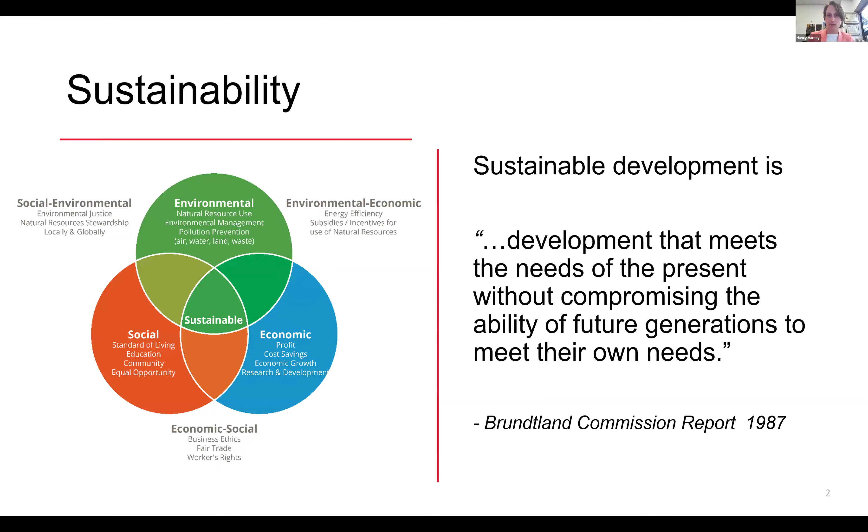We have to make sure we're making decisions in terms of costs and money, as well as the carbon, the environmental side of things. So we always need to keep in mind that sustainable development, when we're thinking even about building new buildings on campus, is making sure we're meeting our present needs without compromising the future generations and their needs as well.

One of the big things that we're seeing is this rapid growth with new construction. Just some of the numbers they're throwing out are kind of wild, but thinking about building floor area, office buildings, apartments, everything like that, it's expected by 2060 — these numbers are a little uncertain but still pretty relevant — it's the equivalent of adding an entire New York City to the world every month for the next 40 years. And thinking about that, three-quarters of the infrastructure that will exist in 2050 has yet to be built. So that's a lot of construction, a lot of materials, both costs in terms of money and carbon going out into the world.

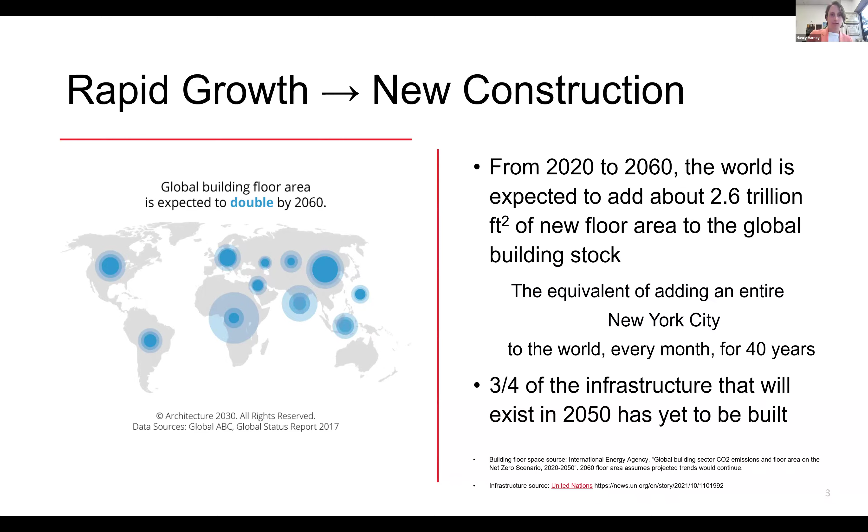So trying to make smart decisions as we go through this. When we hear about carbon emissions, so CO2, we group all of the greenhouse gases into an equivalent carbon emission. Most people think of transportation — we're making great strides in better green energy in terms of our transportation — but the built environment, our buildings that we live in and work in, actually contribute a large amount, approximately 40% of annual global CO2 emissions. 27% of these are from our building operations: heating, cooling, electricity, everything that we use in our day-to-day lives.

And about the rest of it is what we call embodied carbon, essentially what's locked into the building from day one. A lot of this is in our four major structural materials: cement, steel, iron, and aluminum. But also masonry, and all those other pieces that if we can try to reuse, it will help make great strides in creating a greener built environment.

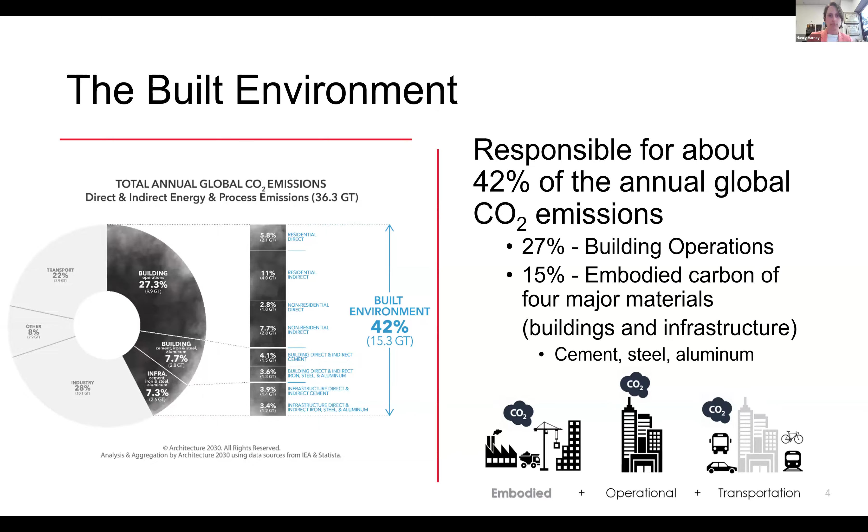We have a lot of organizations focusing on making sure we're reducing carbon in our built environment. Architecture 2030, MEP 2040, and SE 2050 for structural engineers are all targeting different ways, both on the operations side and the embodied carbon side, to make structures greener.

So just highlighting embodied carbon, because that's what we're going to be focusing on today, in terms of what's locked into our buildings and what we're going to try to save when we're going through deconstruction projects.

Our carbon emissions, all of our greenhouse gases kind of equated back to CO2, are associated with building or infrastructure products and the actual construction of them too. It's everything from raw material extraction, digging out the iron ore, mining the limestone for concrete, the manufacturing and transportation of these items through each step in its life, including construction, through the end of life, either disposal or recycling. Recycling is key, kind of keeping everything in this circular economy, but to the extent that we can as an already fabricated piece.

So like I said, once it's locked in and constructed, it's not carbon that can be taken back or reduced. It's built into the structure.

So we see that the majority of our carbon emissions is really locked into new building infrastructure projects. We're continuing to improve operational efficiency through better insulation, more efficient HVAC systems. But what we really need to work on now is improving embodied carbon.

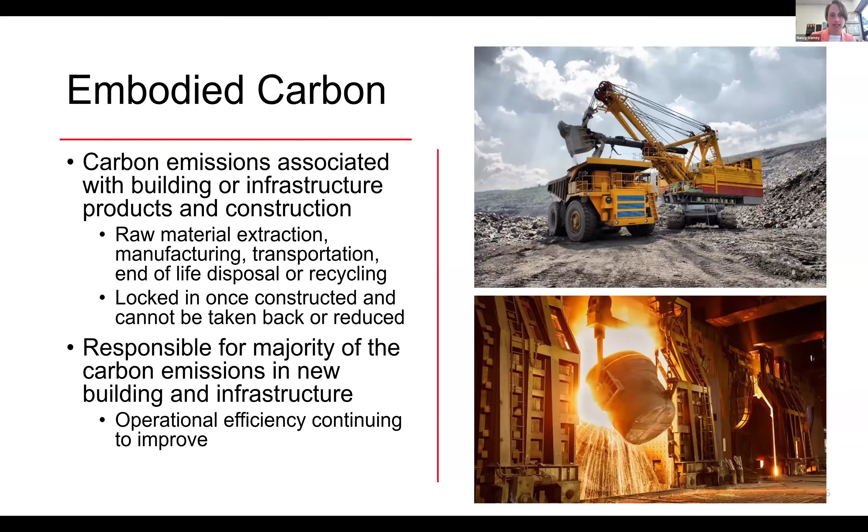So kind of breaking this out into some more Carbon Leadership Forum cartoons, really we're looking at embodied carbon: materials extraction, manufacturing, transportation, all of that is built into this embodied carbon slice of the pie. As we continue to make operational energy more efficient in terms of our lighting, ventilation, water heating, cooking, all of that, we can see that slice decrease, but our embodied energy becomes a bigger portion of it. So now that's our next challenge to tackle.

You may have heard a lot about carbon offsets in terms of our renewable energy production and carbon sequestering, which helps reduce the total net carbon impact, but we need to attack it from all fronts. One solution alone isn't enough.

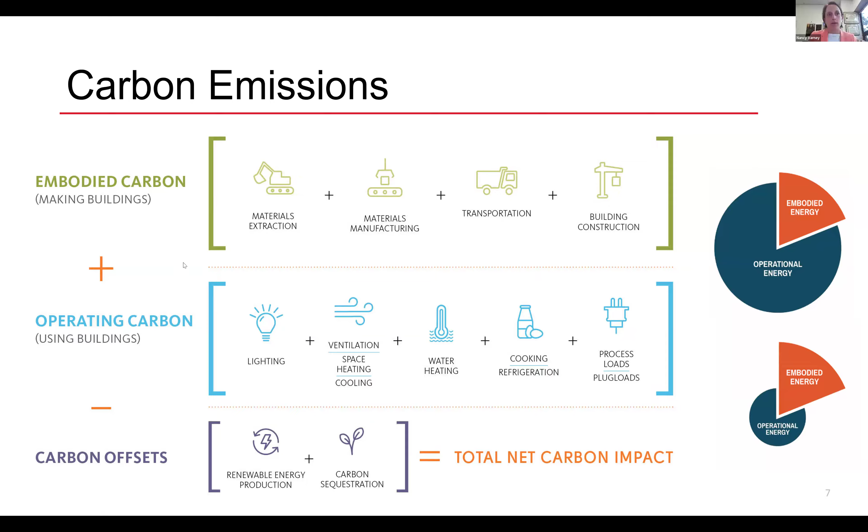Focusing on the structure itself, MEP and other makeup like finishes and things like that are a smaller slice of the pie when we're looking at the embodied carbon of a structure.

And I found this old photo of the Prudential Center under construction, which I thought was pretty awesome, just to see how empty it is around, but it just shows the skeleton and the beginnings of the enclosure going up. But if we're thinking about everything that we're seeing in this photo right now, the structure is 40 to 50% of the total embodied carbon locked into that building from day one, and the enclosure is another 20 to 30%.

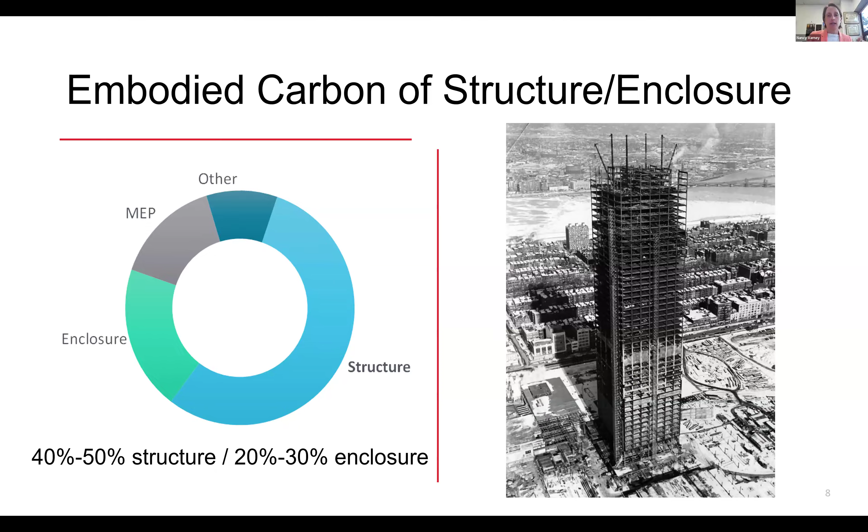So a lot of carbon already going into every structure from the very beginning, before we even turn the lights on. As we go through planning any of our projects, whether it's on campus, in Boston, or in the greater global area, we need to consider what we can do, and the sooner we make good decisions, the bigger impact it can have.

The easiest thing is to say to build nothing. In that case, we're not spending any carbon, we're being very green, but we need to see if that really satisfies our needs. A lot of times we're building things because we're growing, we're expanding.

So we can potentially build less or make use of things that already exist, reinforce bridges, expand buildings, or be clever about our designs, or build more efficiently. Each one of these has a decreasing amount of carbon reduction potential.

Building none reduces 100% of the carbon because you're not doing anything. But it also means you need to start at a different stage in the whole construction process.

Planning, design, construction - the sooner that we can start thinking about these things, maybe reusing existing structural elements or finishes or refrigerators or whatever you have, the bigger impact that we can have. So early stage design decisions are key.

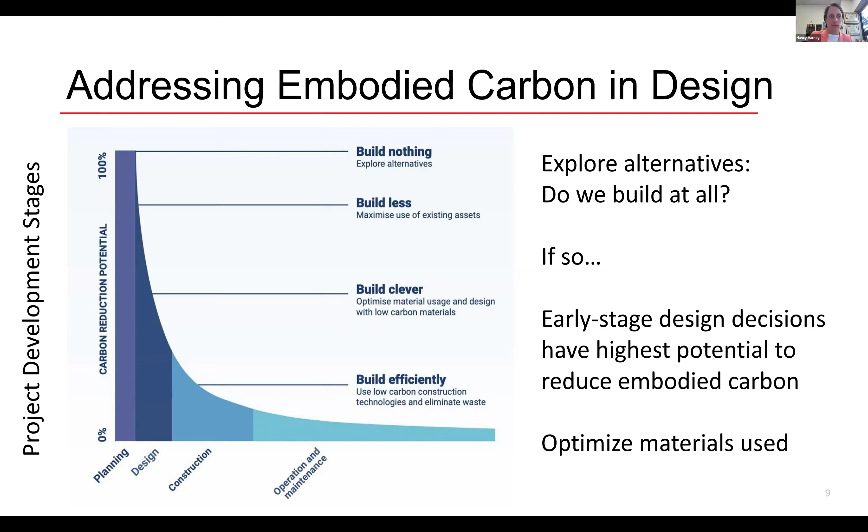And also with that, we can kind of see what else we can do along the lines. So one way to assess an entire project is to develop a life cycle assessment, to take a look at what's happening from stage one, raw materials, through construction, maintenance and use, and the entire end of life of a building. So this gathers information from raw material all the way to where it's returned to the earth.

The best thing we can do is keep all of our existing structures going. But there have been issues with, let's say, structural compromises, or it's just not a particularly useful program anymore. We can find ways to take pieces out of those structures and reuse them in new structures to help keep this cycle going.

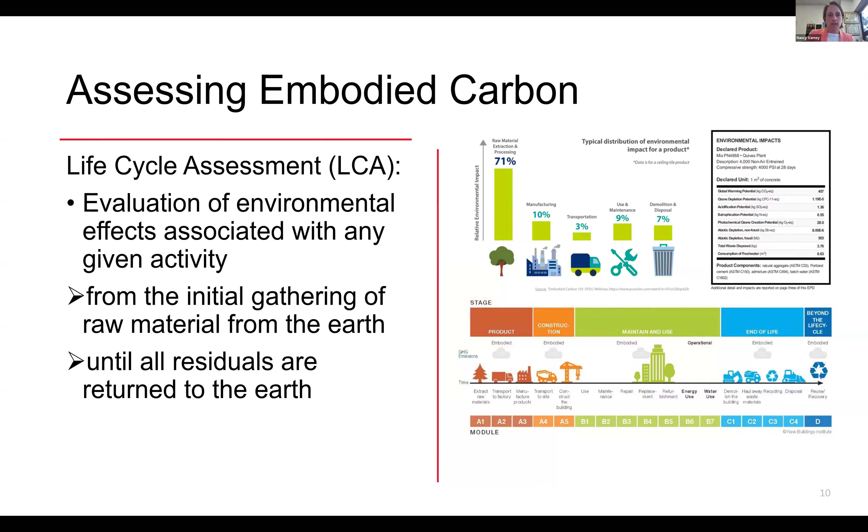So our goal is really eventually to achieve zero embodied emissions. So this whole reuse, reduce, or sequester is kind of adopting the principles of renovating existing buildings, reusing recycled materials, or even better, reusing materials as they are. We don't have to melt down steel beams if we can pick them out of one building and put them in another.

Or this idea of designing for deconstruction. We can deconstruct a building, reconstruct it somewhere else in a slightly different configuration to keep that use going. In terms of materials, we are using new construction, making sure we're using the right type of materials for the right uses, optimizing sizes, and specifying low to zero carbon materials to help decrease the overall impact. And then sequestering is our third step, which is trying to find ways of pulling carbon dioxide out of the air and storing it in some use or another.

A big way of doing this now that people like to talk about is using mass timber, using trees naturally to sequester carbon and lock them into our structures.

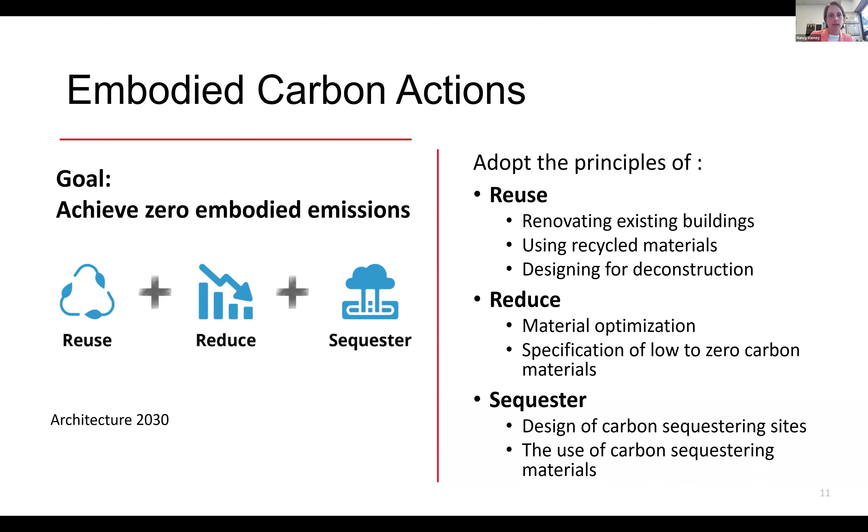What we're focusing on now is what we're doing with our existing buildings that are no longer meeting the use that we need them for. We have to weigh all of our options and decide what's the best course of action, because even demolition alone has a huge environmental cost. Unfortunately, our culture kind of prioritizes tearing down structures instead of reusing or retrofitting them. We like to be in the most fashionable, not only with our clothing, but our structures as well. So changing that mindset is a slowly evolving process.

We can find that as we start to recover and recycle a lot of our materials, we can make a bigger impact. But this consumes additional energy because it's a slower process. You have to be careful about not accidentally damaging the structure as you're taking it apart. It's pretty complex, it takes a lot of time, and for now it only has a minor impact. We need to move this forward and see how we can reuse a lot of our structural members, our architectural finishes, our appliances, everything in existing buildings, and find new homes for them.

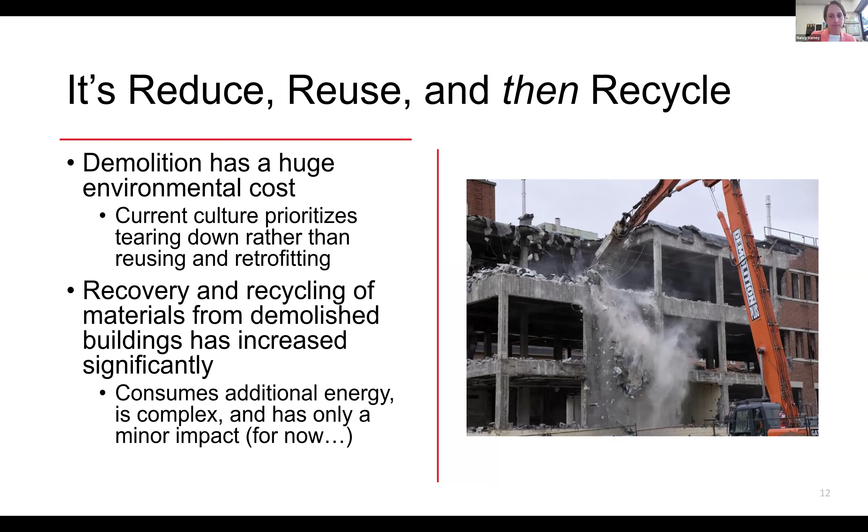So on the other side, instead of just completely demolishing a building, we try to use these materials, diverting them from potential waste streams, keeping them out of the landfill to reduce the consumption of new material, and even maybe contribute to the aesthetics of new construction. If you can incorporate something old, something cool looking, and really appreciate where it came from.

I guess I'm not an architect, so I can't speak to that too much, but I love seeing exposed structure. That always makes me excited, even if I know that it came from somewhere else.

So when we're talking about salvaging as opposed to recycling, salvaging is reusing an existing item with minimal processing. We're not melting anything back down, we're not bringing it back down to a raw material. We're essentially cleaning it up, maybe adding some new bolt holes so we can reuse it, trimming it to size, but we're not putting in as much energy as recreating the entire system.

Recycling, on the other hand, is actually destruction of a used system, melting it all the way back down so that it can be manufactured into a new product. So again, when we're thinking about deconstruction, we need to be careful. It's the careful disassembly, salvaging as many components as possible. You can't really come in with a wrecking ball and start taking out the building. You need to take a more slow and costly approach.

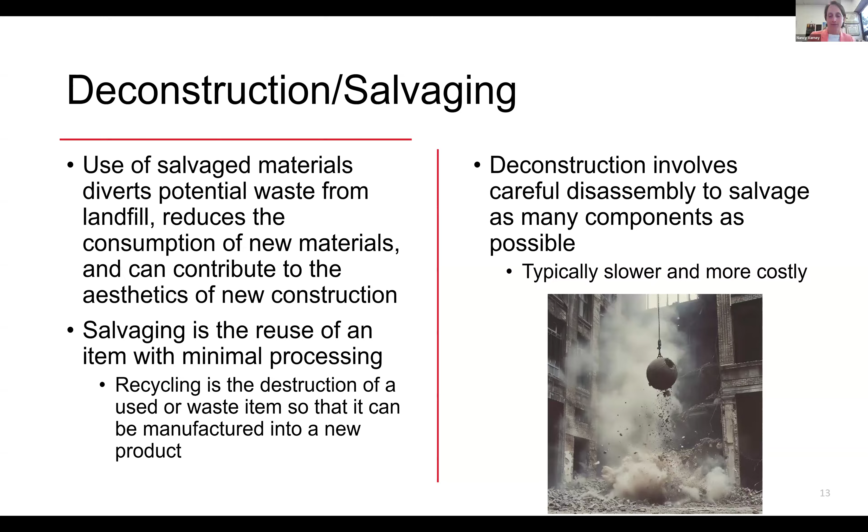So some of our structural design considerations that we take into account are what materials work well. Brick, steel, and wood usually can be taken out of one structure and put into another. Concrete is often what we call downcycled because it can become contaminated through road salts and other issues, oils, things like that. So a lot of times we'll crush it up and use it as a base. It's not often remixed into new concrete mixtures.

Something we need to make sure we understand, at least on the structural engineering side, is knowing where our materials come from, giving clues to their structural properties. We didn't know how strong our materials are, if we're able to weld to them. The photo I'm showing here is an example of a riveted steel beam and column system. We wouldn't necessarily trust this steel to be weldable, so we have to take special precautions when we start to try to strengthen it or attach new members.

And also durability, that's going to be key. Has there been any issues with corrosion, rotting wood, or concrete spalling that we need to consider if we're starting to reuse members?

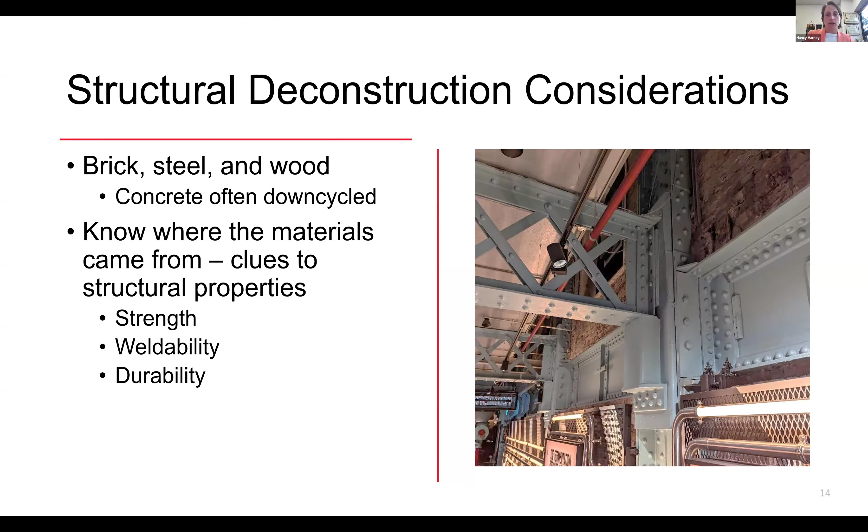So some of our challenges, let's say you have this great old building, it's got some good bones, but we want to make sure we understand all of our challenges before we start to take it apart. One would be going through our material testing to understand the properties so we know what we're able to use in any future designs. Considering any issues with contamination.

Those are all cases where we need to go through and examine everything, but it's tough in an existing structure because a lot of the structure itself, those bones if you will, are hidden. So making sure we understand contamination and damage, either existing or as we start to deconstruct things, will cause issues. So kind of being more careful with what we're doing.

The photos I show on the right are from a Walter P. Moore presentation where they deconstructed part of an old stadium down in Georgia to salvage some steel elements to reuse in a reconstruction of part of that stadium. But part of it involved carefully taking apart the concrete deck of composite steel beams, which is time consuming. So thinking about those logistics in terms of the cost and schedule.

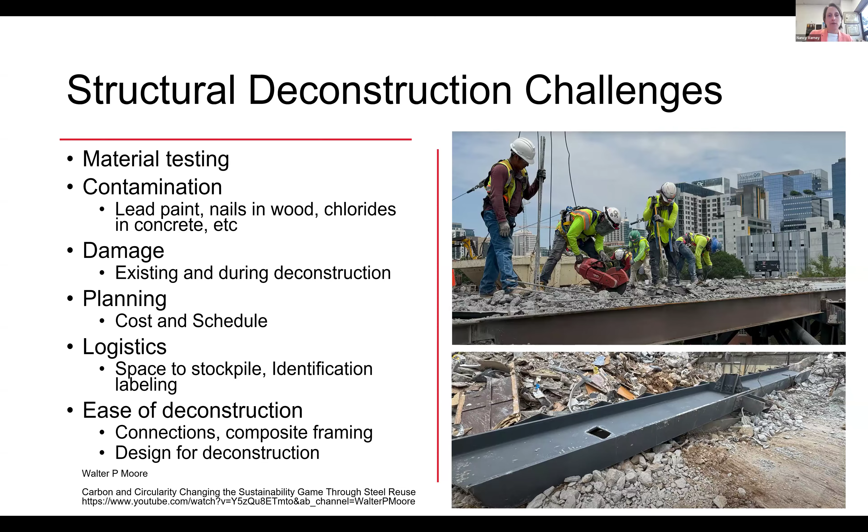So kind of leaving you with one idea, this whole sustainable stewardship, that buildings are vast repositories of energy because of everything that has gone into them already, from the raw materials to the manufacturing, construction, even from day one. And all that energy is embodied already in the finished structure. And if we demolish it and throw it away, everything that was locked up in there is totally wasted. So we want to make sure we can find ways to bring all that back into any new structures and kind of keep this circular economy going.

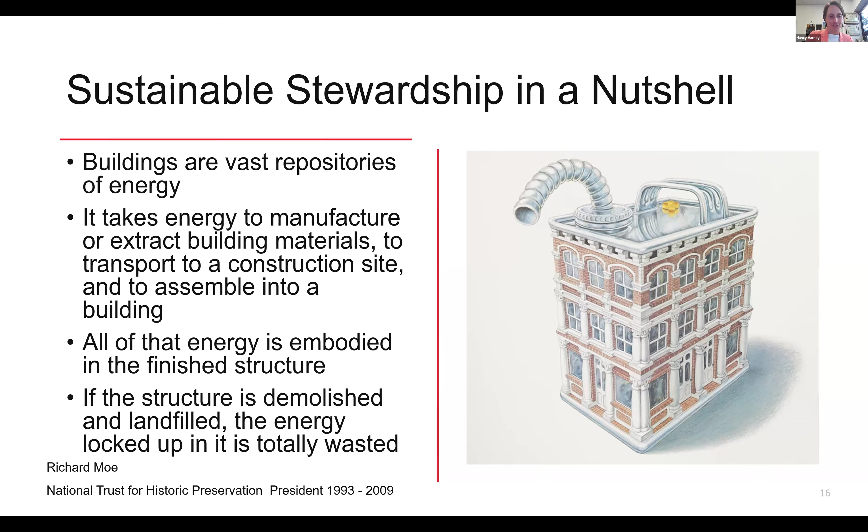And that's pretty much what I have. It's a rough, quick introduction to structural sustainability in a nutshell.

You can kick it over, it's fine. Actually, so, unshare. Juan, if you don't mind, I think maybe keeping it at Nancy, any questions you might have.

So Nancy, thank you very much. That was a really great overview of what's embodied in a building. Would anybody have any questions right now, just for Nancy? We can always ask them later, but anything come to mind for folks?

I have a question. You referred back to being able to sequester, I think that's the word you used, carbon in the materials. How do you kind of figure that, particularly when you're talking about cross-laminated timber? How does that figure into the modeling?

So when we're working with timber in particular, we work closely with forestry experts, with the idea that if you let a forest grow, the trees are going to continue to sequester carbon throughout their lifespan. But if they were to naturally die and rot or burn, that carbon gets re-released into the atmosphere. So through sustainable forestry, we can actually cut down the trees when they reach a certain life, since they're not sequestering as much carbon as when they're younger.

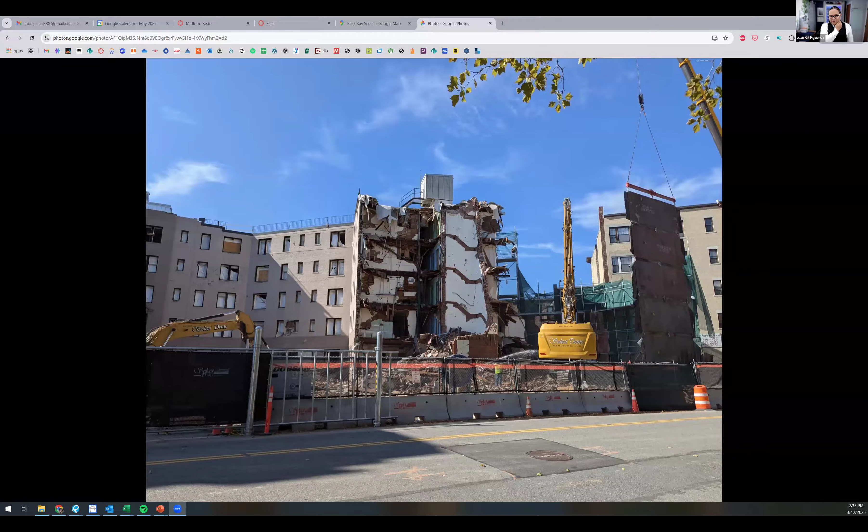So that's actually that guy there, that's a 30,000 pound steel plate system that was custom made by the demo company, so that if something were to release off the building, it doesn't go into the street or hit any of the adjacencies. It's an incredible system, and it took a lot of coordination to make sure it was there and that it wasn't in the way.

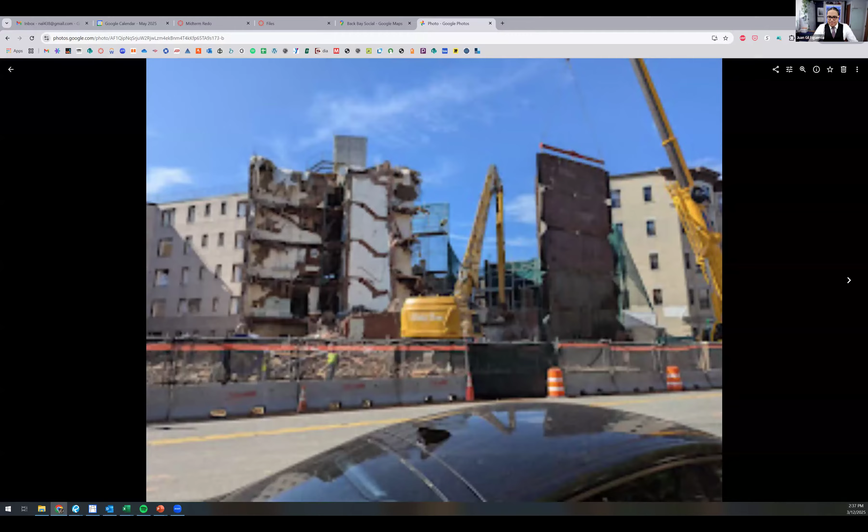Did we reuse that? Did Select Demo reuse that steel plate? Yeah, that is their own master craftsman system that they reuse.

Select Demo was the subcontractor on the demolition. They do a lot of demolition around the city, and honestly, they were great partners, not only in the planning and working through, but also the president of their company was on site for the two weeks of demolition every day, fielding and making sure, because the proximity of that site to our neighbors was huge.

We have apartment buildings that are leased partially by the university to house some students, also have their own apartments there. So we wanted to make sure we could take the building down without putting anybody's life in danger. We also have the playground adjacent that we wanted to reuse, and that needed to be protected.

So there's a lot of planning and careful coordination that had to go into it, to talk about what we have to do to make sure that we can protect the community, protect assets around us, and that we're minimally impacting the people around us, which is easier said than done.

Any other questions? My question was largely about embodied carbon avoidance calculation. Is there a figure that gets factored into that to compare against a complete demolition, a normal demolition, in terms of protecting the surrounding areas? What is that financial kind of consideration?

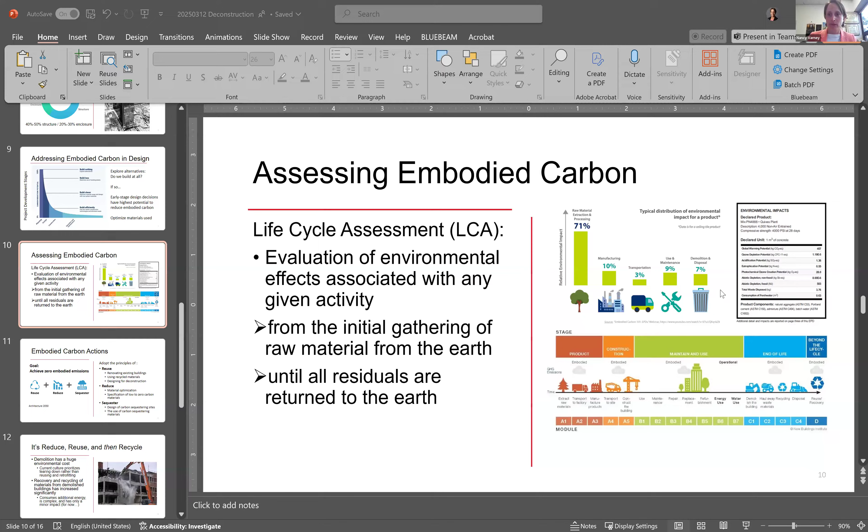Essentially, it looks very similar to a nutrition label, like on a pack of cookies. Similar to that, it can help guide your decisions - is this worth salvaging, is it worth reusing when we're thinking about trying to save pieces. It takes more effort, more thinking, more planning, but it can help show that this process is worth it.

There's a question in the chat from Nate Comte: an apartment building going up across the street from mine in Nubian Square ground up the demolished building material and concrete, used it at the base of a new building, as Nancy mentioned, which is very cool to watch. Beyond the refrigerators and lighting, were other electrical and mechanical systems retained, reused, or saved, such as HVAC, etc.?

That's part of the second part, and actually part of the first part - we left the caissons, which are the actual structural system, in place. When that site gets developed, they'll rethink whether they can use the existing caissons or whether they'll have to be removed. For example, Marino sits on a former site that did reuse the existing caissons, so the structural system could be used. It'll depend on what goes back there.

I'm not part of that, but talking about the other systems, we did look at mechanical systems and HVAC. We pulled parts as needed. The whole systems were a little older than what would have made sense for us to reuse, so all the metals that were pulled from it get salvaged as part of the demo contractor's contract.

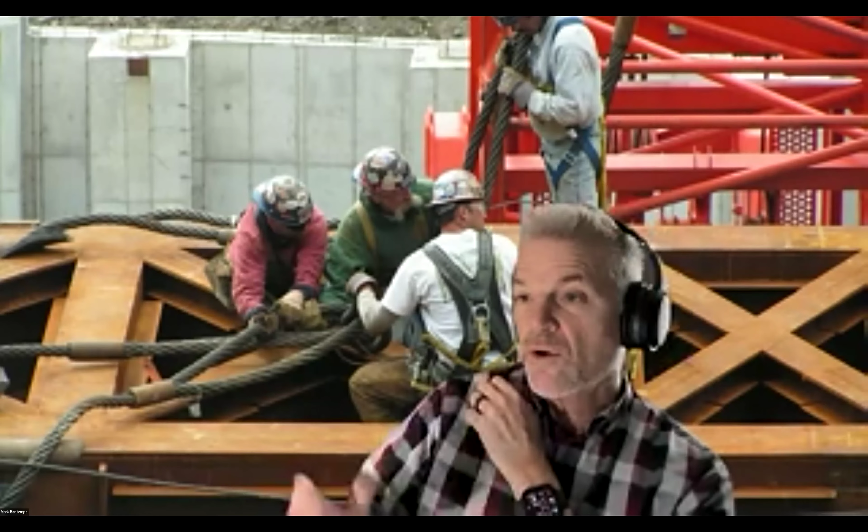I'd just add to what Jacob said — there was a great article, I believe from Northeastern News, with some renderings of what we plan on doing with the arch and stuff like that.

One struggle with reusing the roof trusses, for example, is that if you analyze that building with today's codes we'd have to design for, it's not quite strong enough with wind and seismic changes. So anything new we're doing is essentially built more robust. It's definitely stood the test of time, but we'd have to make changes to any new structure, even reusing existing pieces.